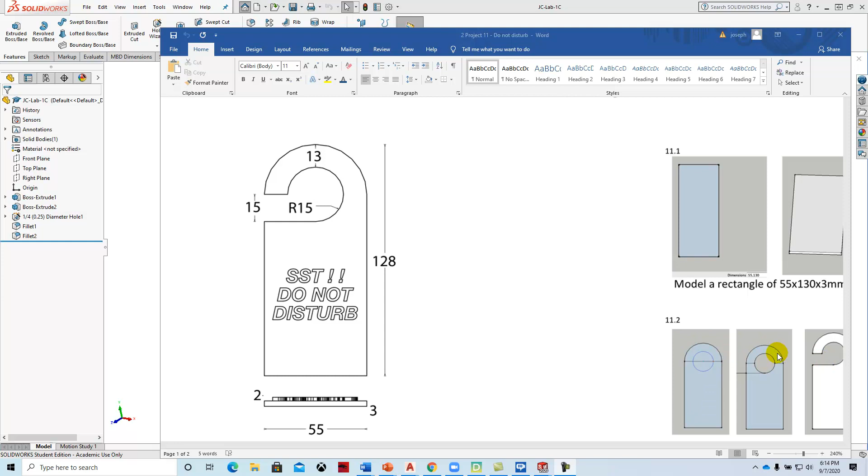The base of the do not disturb sign is 3 millimeters, and then the letters protrude 2 millimeters up. There's some basic CAD work right over here that kind of shows how that looks. Draw a rectangle, and I would put everything on the initial layer and just extrude it from there. So that's what I'm going to do.

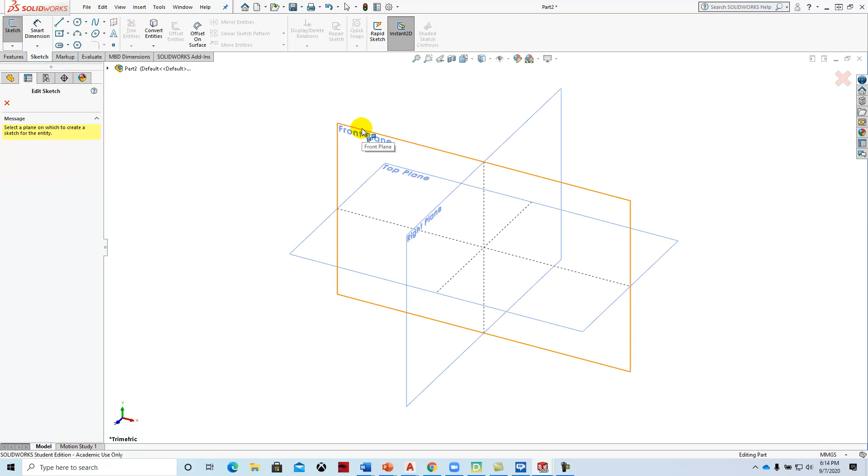So we'll start a new part. We'll get rid of the swatch. We'll go over to millimeters. We'll go to sketch. Start a new sketch on the front plane. And we'll start by just drawing a line 128 approximately, by 56. And you just eyeball it when you're working with SolidWorks sketches.

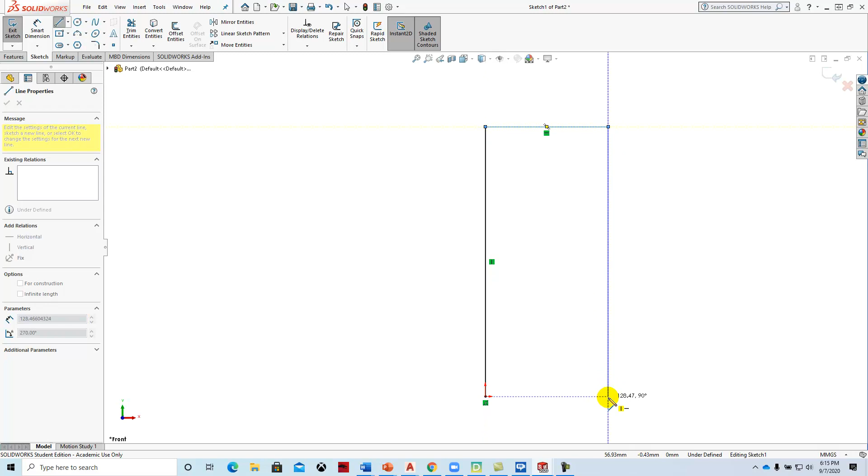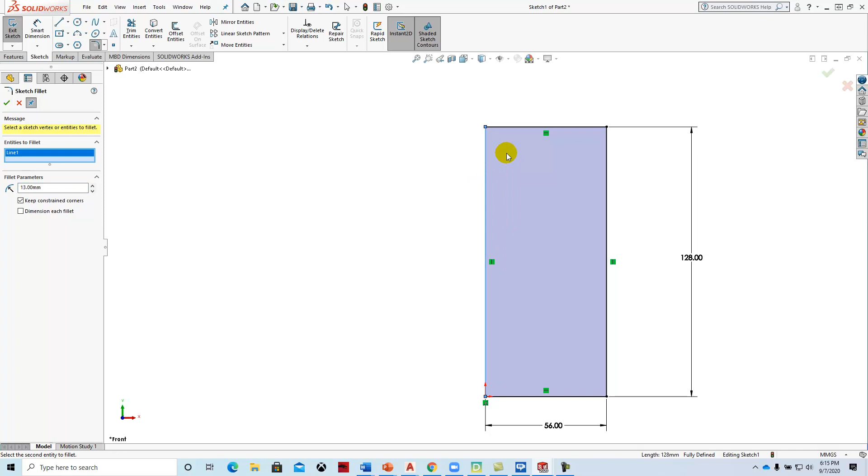When we add the dimensions, it will then be fully constrained. And so we'll say 128 by 56. And then we'll put a 13 millimeter radius. See if it'll do it. That would be 26. Let's do it again. Perfect. And then we'll add a 15 millimeter radius to the center of that.

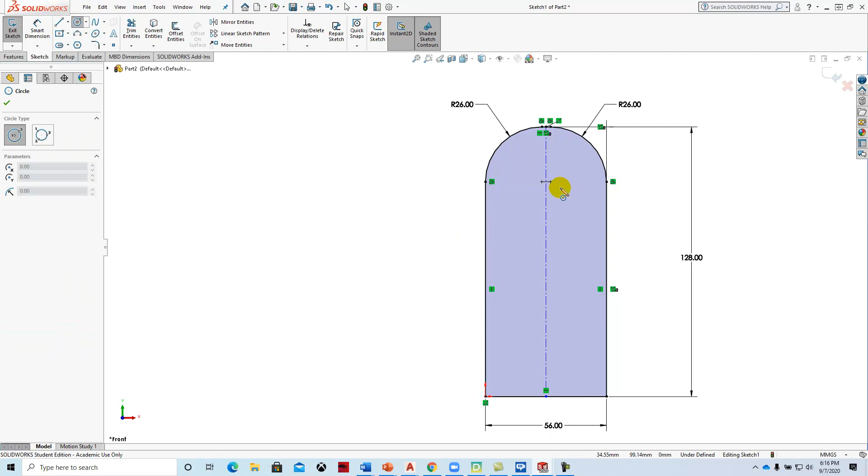And I'm surprised I have a little bit of a flat spot, but we'll work with that. So I'm going to draw a center line down the middle. And then I'm going to draw another center line through these 2 points. And I'll draw a circle right at the intersection. And it'll be a 15 millimeter radius.

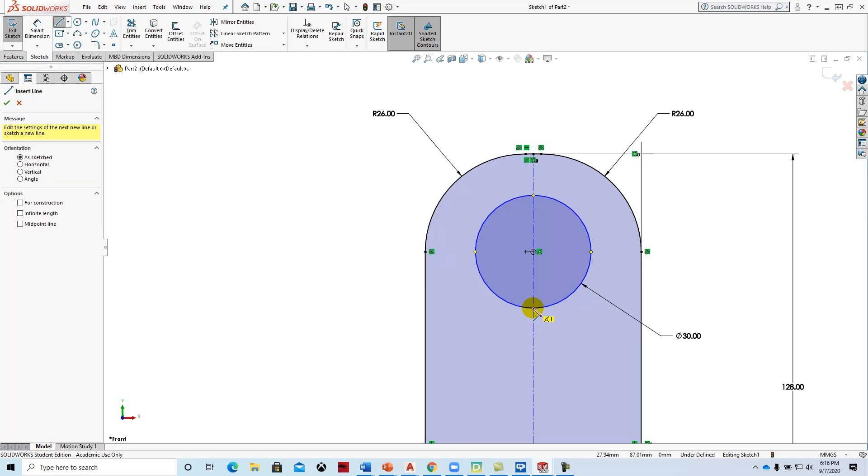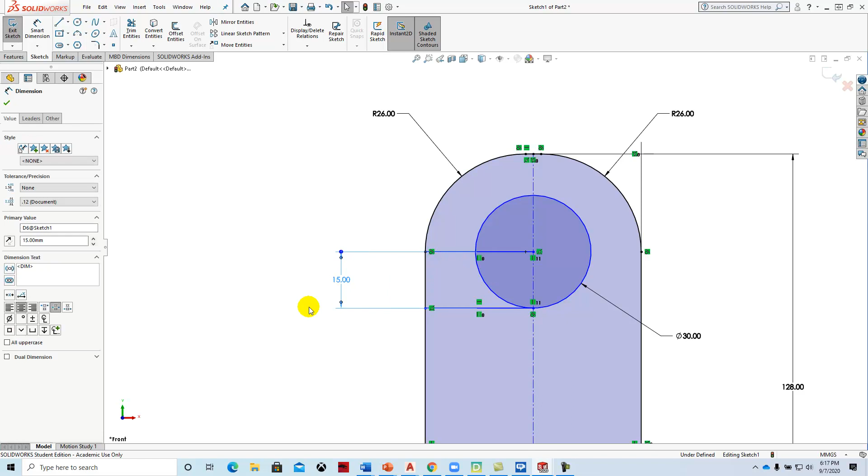And then we'll draw a line. We'll wake up this point right here, horizontal to here, hit escape, and we'll offset that 15 millimeters. I will trim. And I'm not sure, I'm going to have to delete that. There we go.

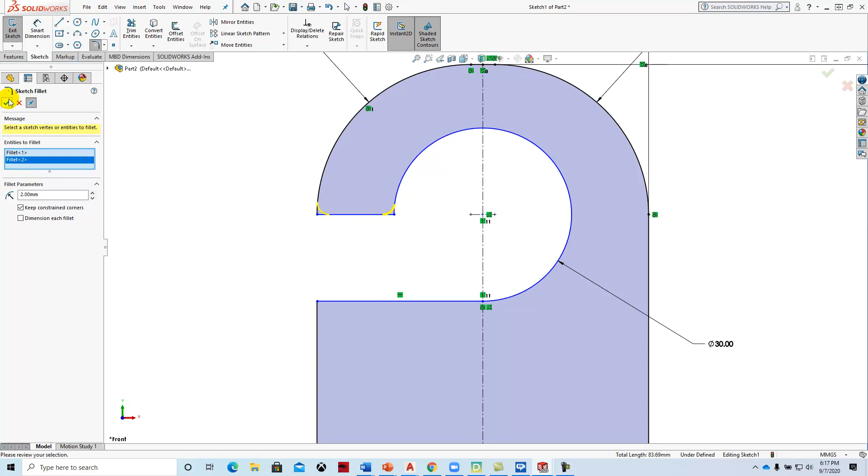And I might put a little radius on this edge here just so that it has just a little something. Let's put a 2 millimeter, something to soften up the edges so that when it goes on the doorknob, there we go. Great. All right. We're going to extrude this 3 millimeters. So we'll green check mark that.

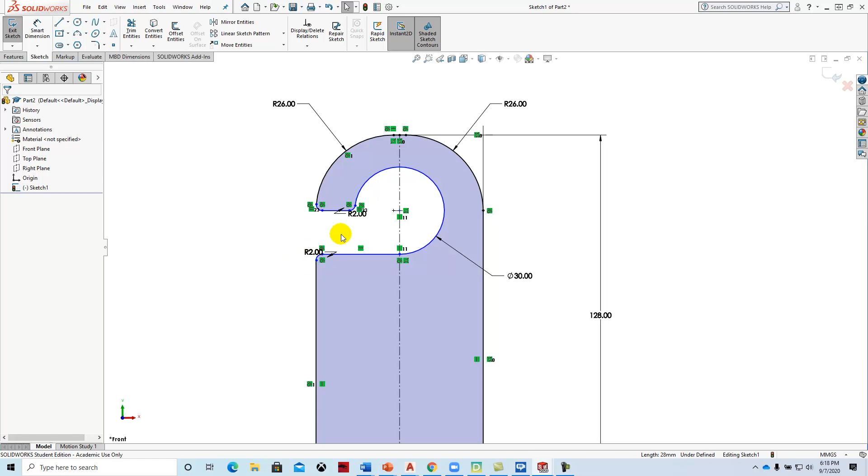As far as being fully defined for all of these components here, at this point we're not going to worry about that. So we're going to say features, extrude boss base, and we're going to extrude that 3 millimeters. And then we'll green check mark it.

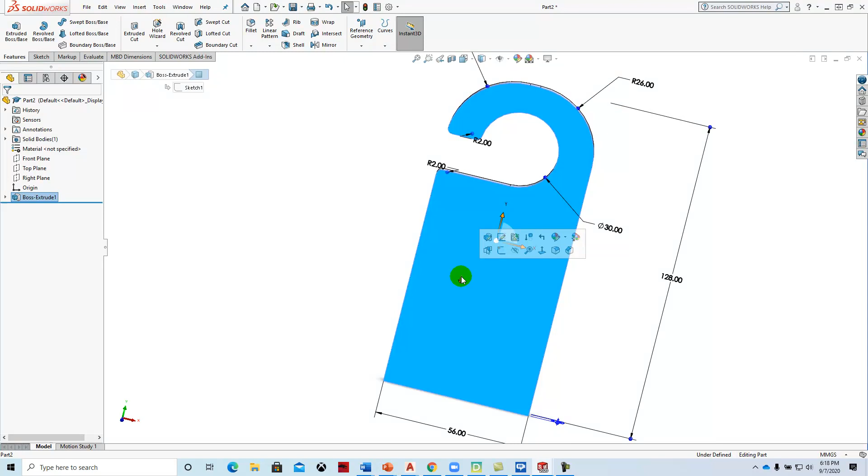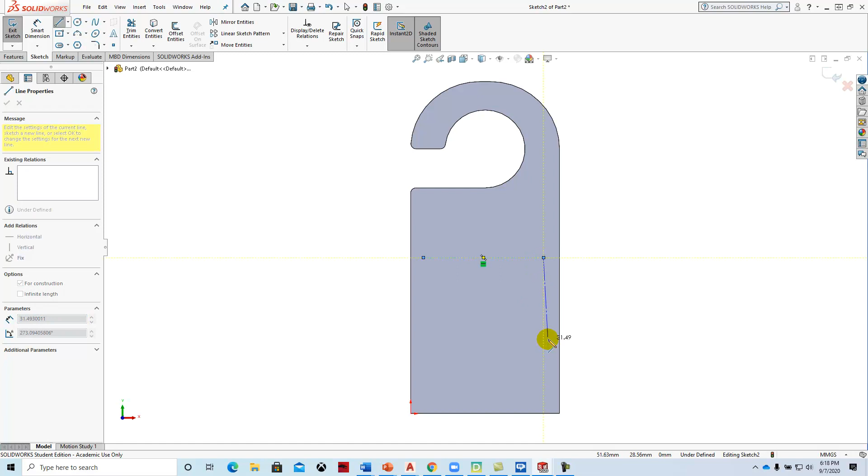And then to put on the text for this exercise, we're going to click on this surface and say Sketch, spacebar, normal to, and then we'll create the text. And so in the Sketch tab, there's a text, and we start with a center line that'll be used to locate the text. And so once we have that center line on there, we can then go to text, and this is the curve that it's looking for.

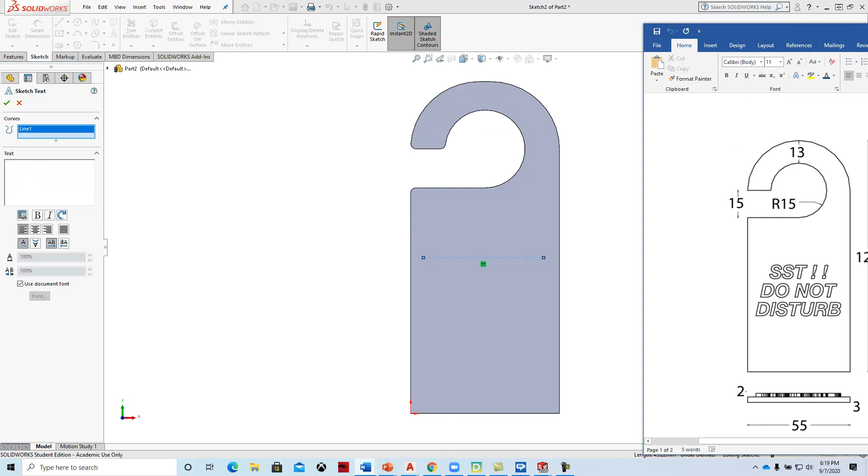So we could select that, and then as far as the text goes, instead of doing what it said, SST, which I think was supposed to be SSH, we're going to say video conference. And we're going to take that and make that a little bigger.

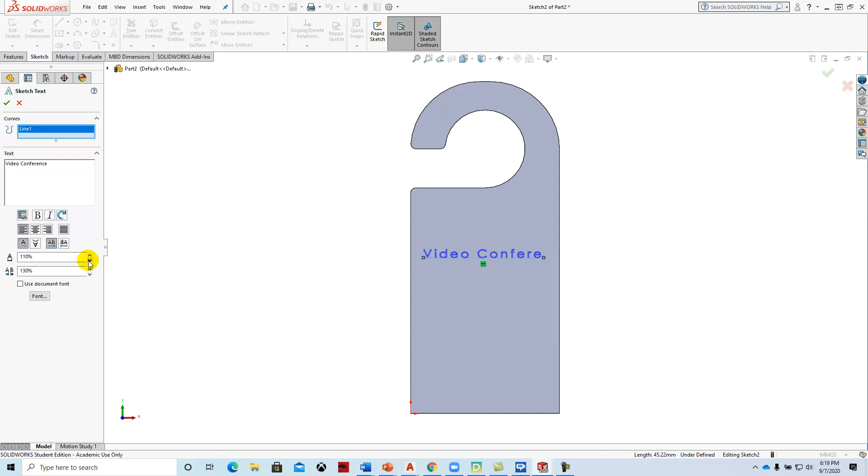And so what we can do is we can get rid of this use document font, and then we can increase this a little wider, a little taller. Maybe not so wide. I'm afraid it's really not quite big enough. So let me go down to 100%, and then let's look at a different font. And so let's go to 100% on that font.

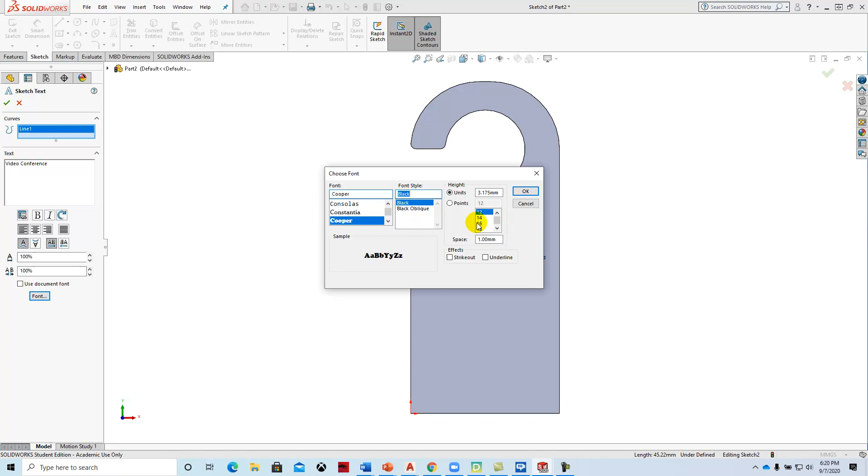And you want to choose something that's bold and that has sort of an open shape. Something like this Chiller would be difficult to 3D print. This might look good. This Comic. Cooper. Let's look at that. And so we'll say 12, Black Oblique. Let's go with that. And then on the height side, let's say 4.

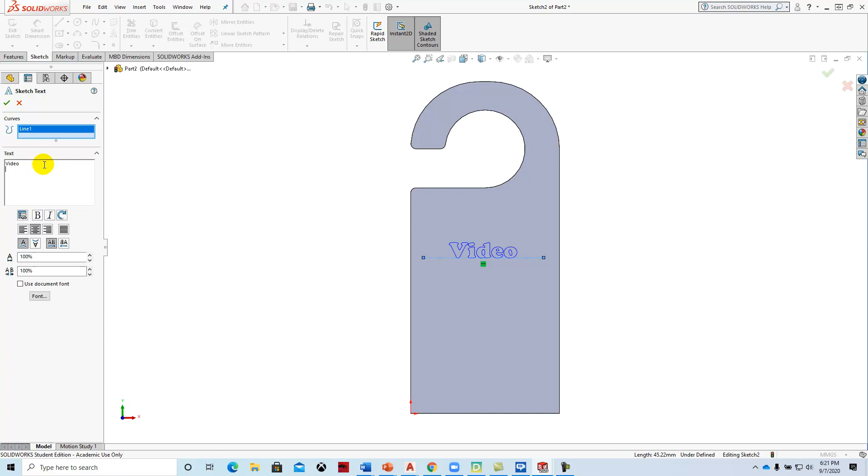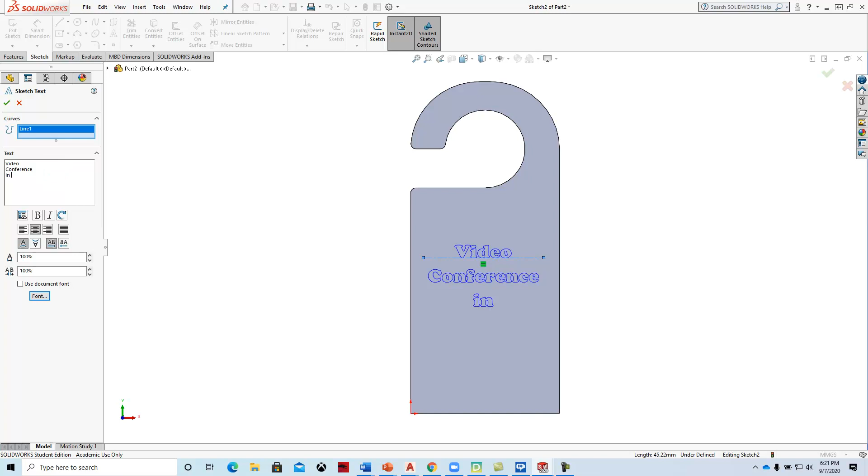And I think we'll just put this on a separate line, and then we'll bump that up a little taller. So we'll say 6 millimeters. And then we can take this, highlight it, make it centered, hit enter, put the next line, almost. So let's dial it down to 5. There we go. All right, and so that's our sign.

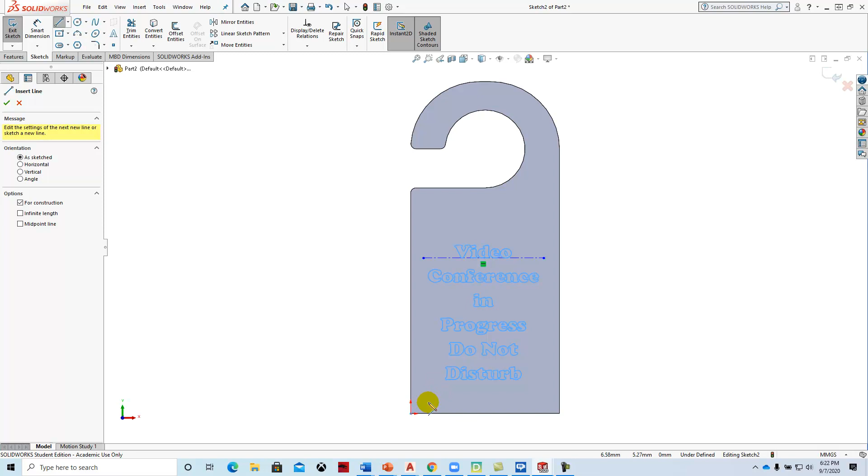And then I'm going to add a little logo to that. And so I'll put my initials on there so that when we print these, we know whose they are. Let's just put it down here in the lower left-hand corner. Hit escape. And I'll go with text. And I'll say this is my curve. And I'll put my initials on there. And I'm going to make this a little smaller. Good enough.

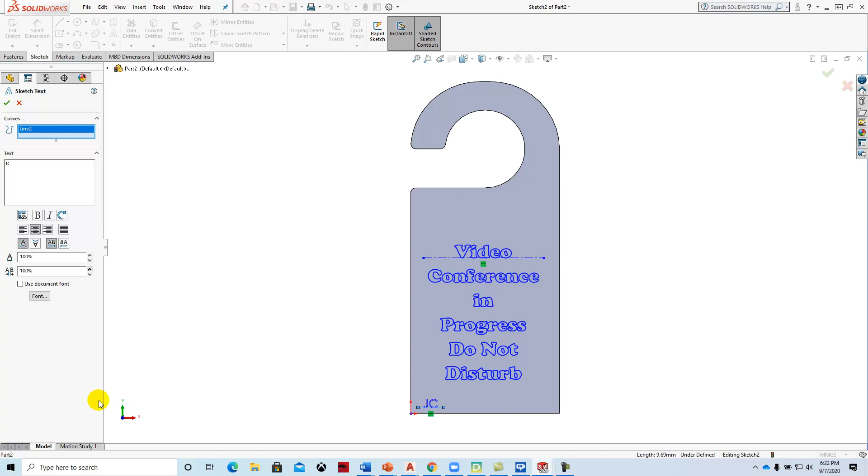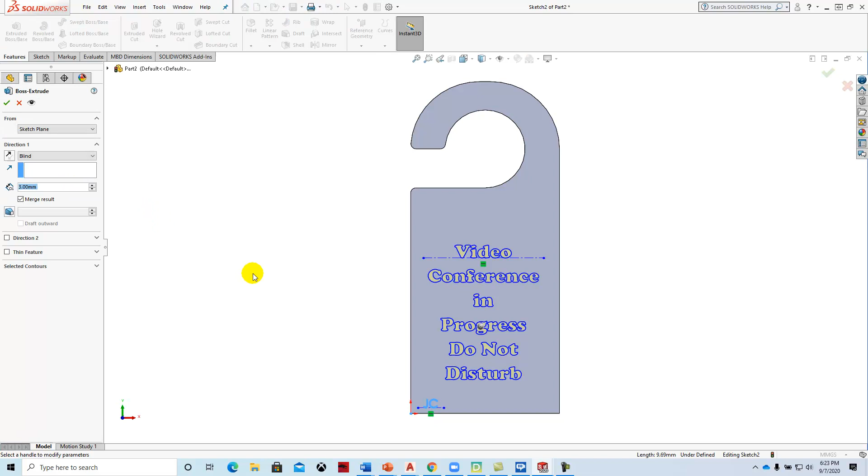And then we're going to extrude this a height of 2 millimeters. So we'll say Features, Extrude Boss Base. And you can see it's kind of caught the letters. If you change the angle of it, you can start to see that it's going to extrude that. We're going to say 2 millimeters, and then we'll green check mark it.

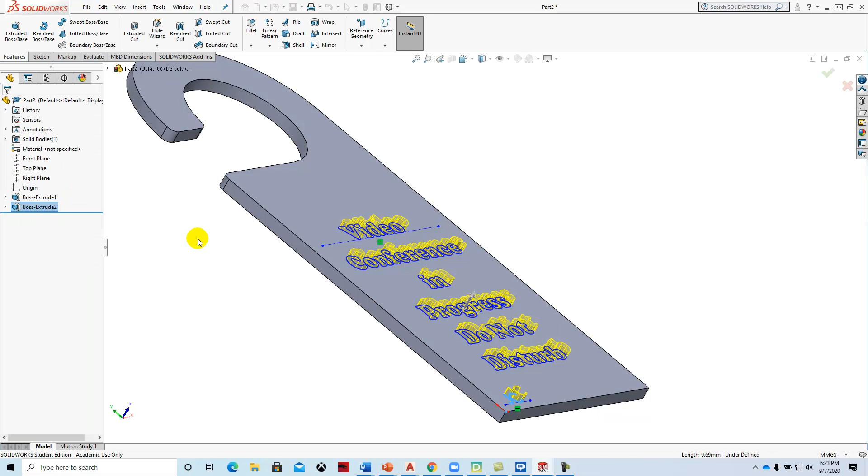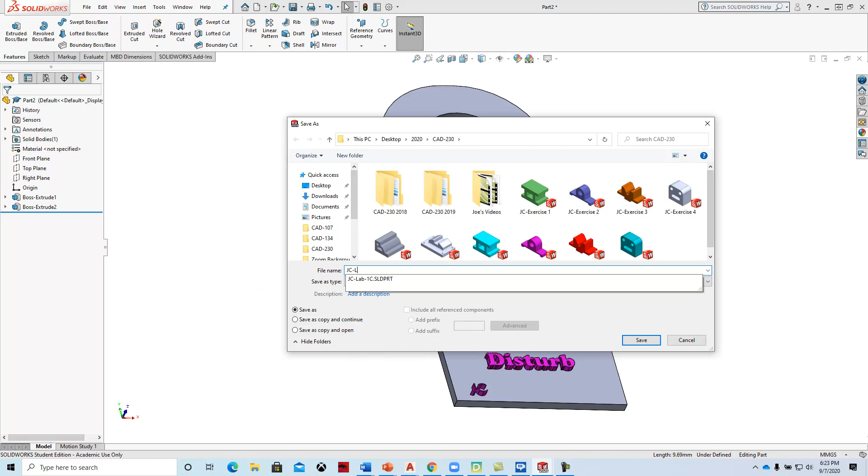All right, we can change the color on that if we decide to. So we'll go over here to the beach ball, and then we'll make the boss extrude purple, and we'll leave the rest gray. We'll save the part, file, save as, save it as your initials, -lab2. And we'll put that in our 3D printing directory.

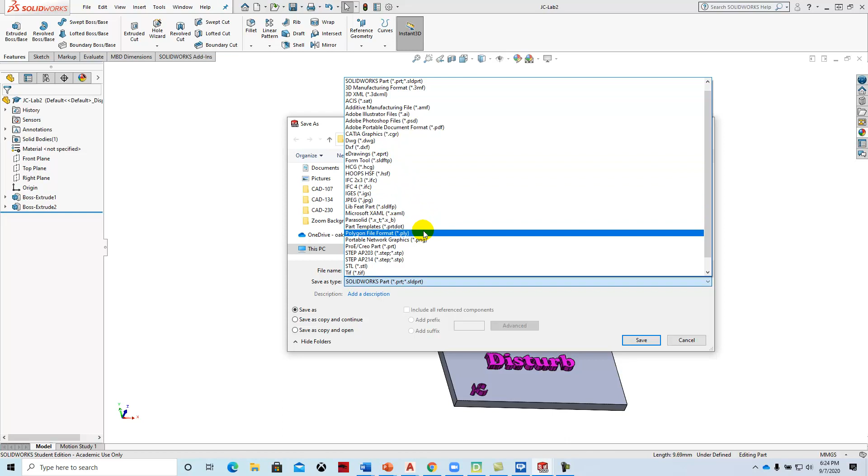And we'll also save one more version of it as an STL. Save as. So that's going to be our stereolithography file that we'll use to slice it in the DigiSlicer for 3D printing. Yes. And that completes this exercise using SolidWorks.